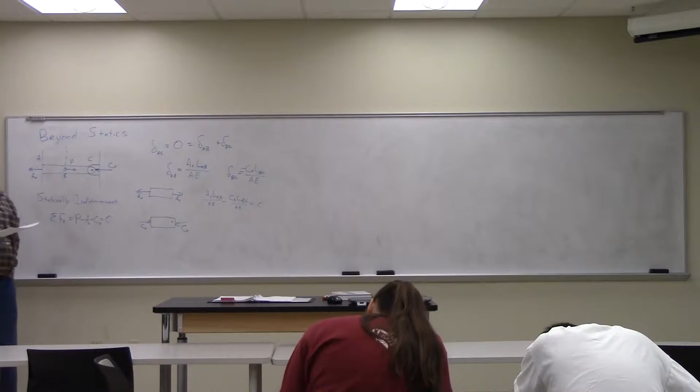Hey, can I just take a minute? Yeah. What is the proper terminology for E? Is it elastic modulus or Young's modulus? Okay, so elastic modulus, that will be fine. So it's just a number representing how stretchy something is? It's the slope of the stress strain curve, yeah. Because most everything we do, we assume we're behaving in an elastic regime. We don't want anything to plastically deform, to deform beyond coming back. And if we do, we deform it, and then we put it in the system, and it behaves elastically up to that. Remember, we talked about it, but once it's been strained, we have the strain hardening, so we're still working in that elastic regime. Okay.

So, we can cancel out the AE because it's the same for both ends of the bar. And we're left with an expression then for AX in terms of CX: LBC over LAB times CX. And if I come back to my original sum of the forces and solve this for AX, that has to equal P minus CX.

So I've got two CX's in there. Let me rearrange the right-hand side of this equation. Well, I'll just skip to the end. You can go back and do the algebra if you want. CX then is going to equal P times LAB over the total L. And AX is going to equal P times LBC over the total length.

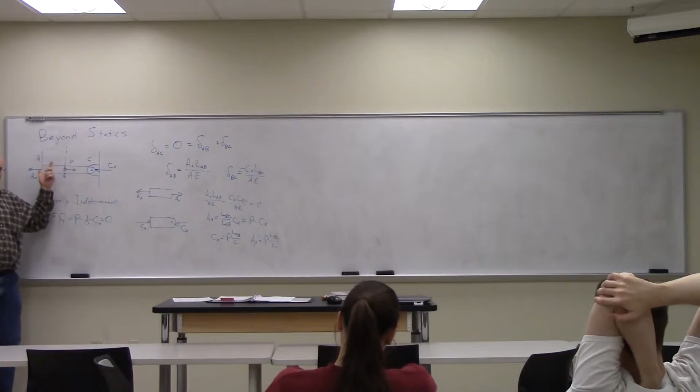No, we're not cheating. We could do it with P in there, it would just be harder, right? Then in here we'd have a P pulling in this direction, a CX pulling in this direction, and then we'd have a P minus CX pulling in this direction. We'd be right back where we were to begin with. So mathematically solving for it would be difficult, if not impossible, because we just have too many unknowns.

So the effects of the force of P are contained in our CX and AX, right? Right, yeah, because this is where P comes in. So we're just trying to figure out what is the distribution of the reaction forces between C and A. And what we found is the distribution depends on the relative location of the application of P. So if you think about it, CX is P times LAB over L. As LAB gets smaller and smaller, CX gets smaller and smaller. But that makes sense.

If P comes all the way down here, then I'm going to get a huge response from this thing and not so much down here. You can kind of sense that it's a piece of rubber. If I'm pulling on a hole that's right here, the real stress is going to pop right here. All the stress is going to be placed here, and there's barely going to be anything felt down there. Does that make sense? Yeah.

I guess the only other thing I would ask, this is getting a little bit out there. We can do that for that one force in the middle, and I understand that now. But what if we have two forces, like two holes like that? How does that change the dynamic? Right, so in the simplest sense, it changes the dynamic because you have to do the analysis twice and use superposition. Okay.

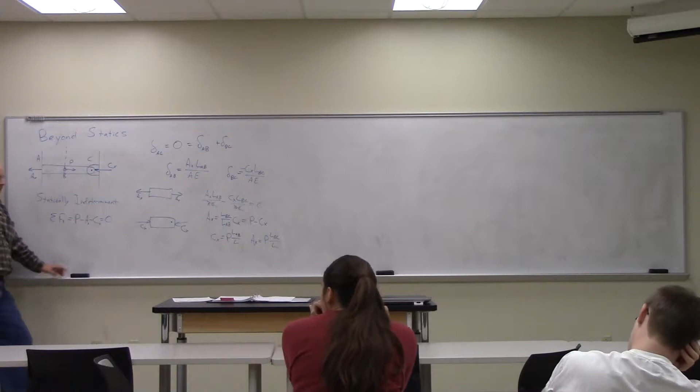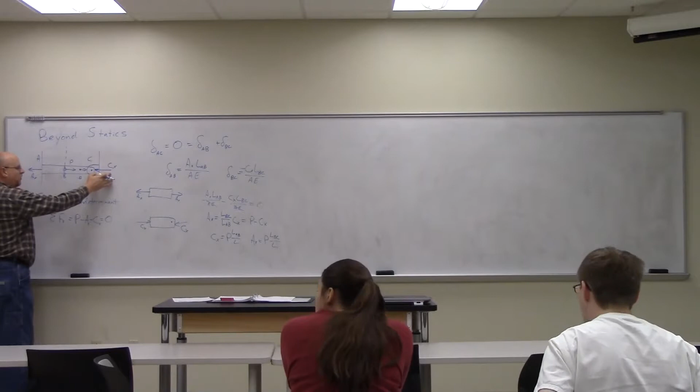Right, because that's how superposition works. So it still holds. You could do the same thing straightforwardly, you just end up with more terms and more equations. And you'd end up with something for CX that is the sum of P times LAB over the full length, plus, if I have a point D in here with another force F acting on it, F times LAD over the full length. So superposition. That's where we'll end up in the end.

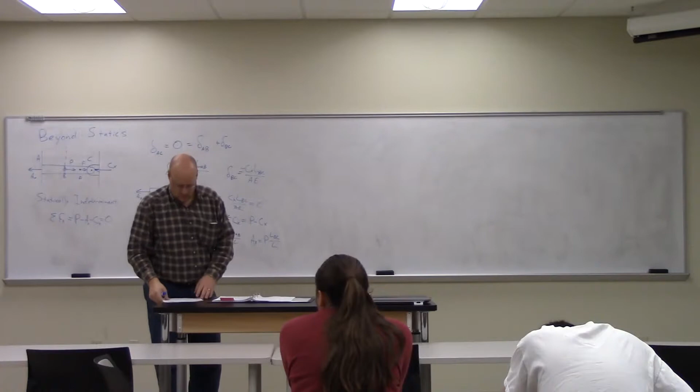Okay, that makes sense. That's why superposition is particularly helpful. In fact, we can use superposition to go back and do this analysis. Let me take that off of there.

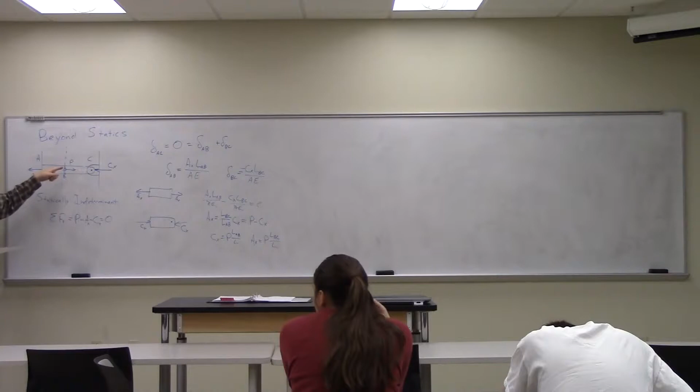We can use superposition to go back and do the analysis in the first place. We've got that the delta of the whole thing is equal to 0, equal to delta due to P minus delta due to C.

So if we look at this picture, I can break it apart into the two ends, geometrically, or into the displacement due to P and displacement due to C. Because AX, and I'm measuring all my displacements relative to this fixed barrier, AX does not contribute a displacement. There's no strain due to AX, because that would be delta over L naught, and L naught for AX is 0.

Because I'm starting out right here, where the force is applied. So the only forces that cause an elongation are P and C.

Going back a little bit, could you do the algebra real quick for AX? So I essentially moved the C to the other side. P is equal to CX plus LBC over LAB times CX, which is equal to 1 plus LBC over LAB times CX, and 1 becomes LAB plus LBC over LAB times CX.

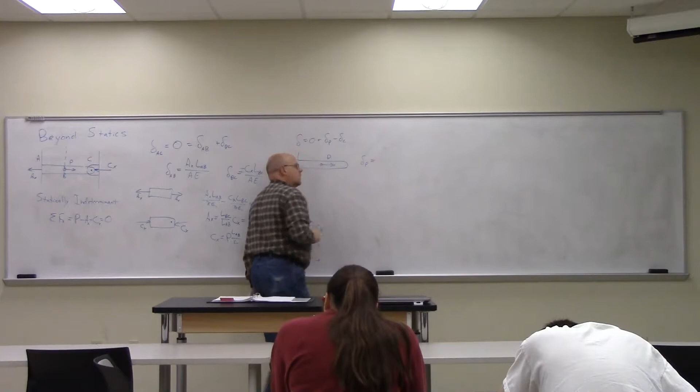Now if we do it in terms of the forces, I first look at it as if it's a bar with no constraint at the end and just force P pulling on it. So delta P, delta due to just P, well there's no extension in this end at all, because it's not experiencing any force in this configuration. So delta due to P is just the force P times the length over which it acts, AB over AE. Right, so essentially I'm just pulling on this little section, and that's just dead weight at the end.

Similarly, I can draw the same thing, but now I only have CX acting, and P's not there. So delta due to C is equal to, let's leave it as a plus and put the minus sign down here. So delta due to C is CX, the applied load, times the full length of the bar, because in this case CX is compressing the whole thing, divided by AE, but because it's compression, it's negative.

So now what I end up with is P times LAB minus CX times L is equal to 0. Getting rid of the AEs because they're the same. Move to the other side: CXL is equal to P times LAB. Dividing through by L, CX is equal to P times LAB divided by L, which is what we had before.

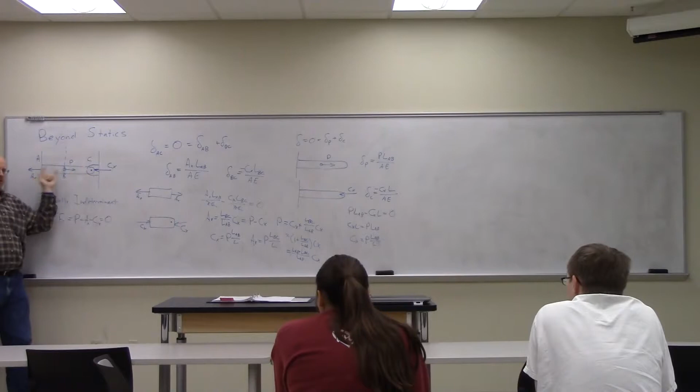So either approach works. Superposition, or treating it as geometrical superposition or load superposition, both arrive at the same result.

Why were you ignoring A again? Because A is applied here, and this is my 0. So there's no length, no initial length for A. It's sort of like the piece of paper—I can push on that all I want, but I'm not getting any displacement on it.

Okay. How do you feel about that? Clayton feels okay, not everybody else. You guys with me? Okay, we're kind of put on the spot then. Last person to say yeah. Not me. Not you, okay. All right.

So effectively we just need to understand this fundamental rule: it's all about the contribution from the reaction forces—the magnitude of the reaction forces is the total load applied, normalized by the opposite end, the ratio of the opposite end.

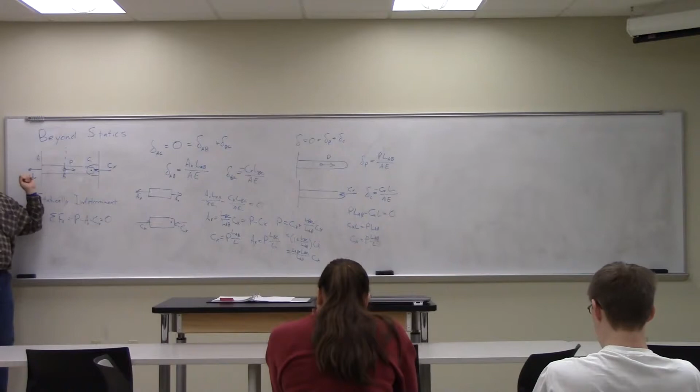All right, so then by sum of forces, you'd end up with the AX expression in that equation, if you did sum of forces. All right, so let's look at a...

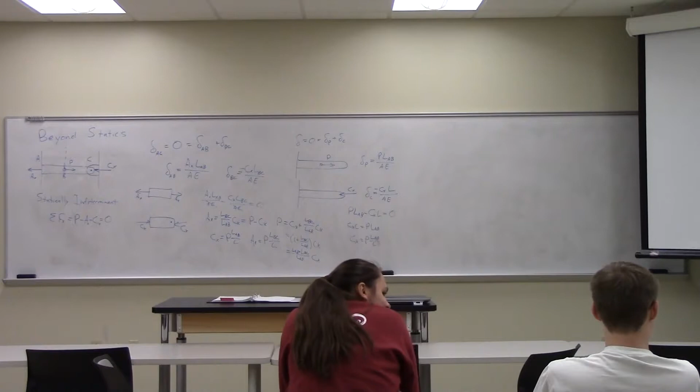Hey, you're a hacker.

We could build an antenna, see how much strain would go on the keyboard if we threw it down the balcony. Ooh, I like that idea. Check out the plastic. I was focusing on the classroom material here, I'm sorry. That was classroom material. Yeah, we wanna see how much strain it takes if you throw that off the balcony, how much strain it would experience. What specifically can we measure when it hits the floor? Only if you had a good way of instrumenting it to measure.

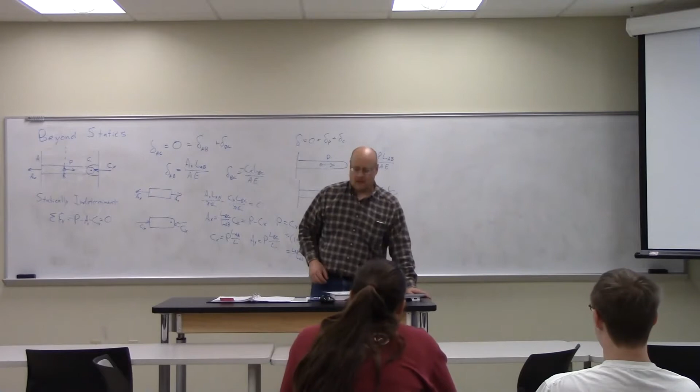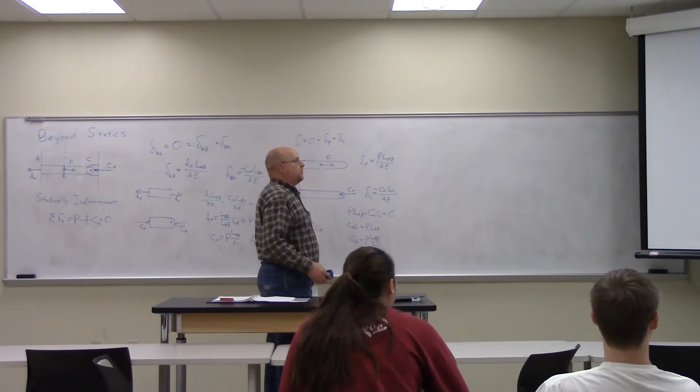You chatted to me, whatever. I was wondering why I saw all those awesome words with your voice coming out of there. That's not electronics. All right, so we're gonna do the first one up there at the top. It's pretty much a steel pipe filled with concrete. Sounds delicious to you. Yep, it's like a donut.

And we're gonna put a compressive force of 80 kilonewtons on it. We need to determine the average normal stress in the concrete and the steel due to the loading. The pipe has an outer diameter of 80 millimeters and an inner diameter of 70 millimeters, and then you have moduli for the steel and the concrete.

So what's the first thing we're going to do? Can we go free body? We need a free body diagram. Okay, glad Blake's back in class. Yeah, we had a channel you last time. I'm gonna take free body for... I channeled you from your sleep. The daily double. Thank you, Blake.

Okay, 80 kilonewtons. So, pretty straightforward free body diagram, right? Not much to it, force on both ends. And we want to find out what the average normal stress in the concrete is, and then how much is in the steel.

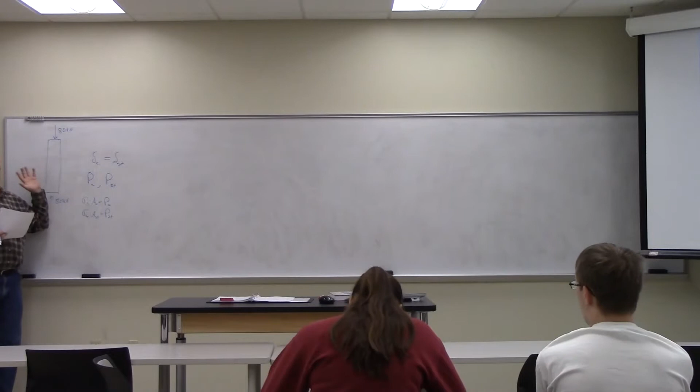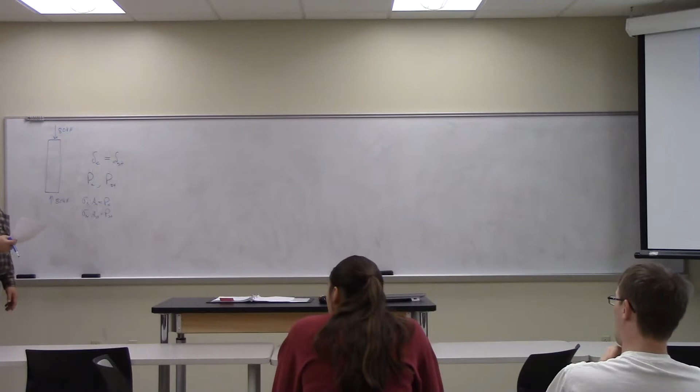So we have to have equations though, right? I mean, these are just redefinitions. We have to have two equations. I was thinking it's stress times area. P is force, right? P is the normal force that I was thinking. You can use P for that. Well, yeah, the last example we used P.

The first equation is easy. What's the easy equation? Sum of the forces, right? So P in the steel plus P in the concrete has got to equal 80 kilonewtons - that's the total load being borne by the column. So we know the fraction of the force borne by one is 80 minus the fraction of the force in the other. That's our first equation.

Now we need a second equation. It's actually already on the board. Expand our delta C or delta ST expressions. So what is delta C?

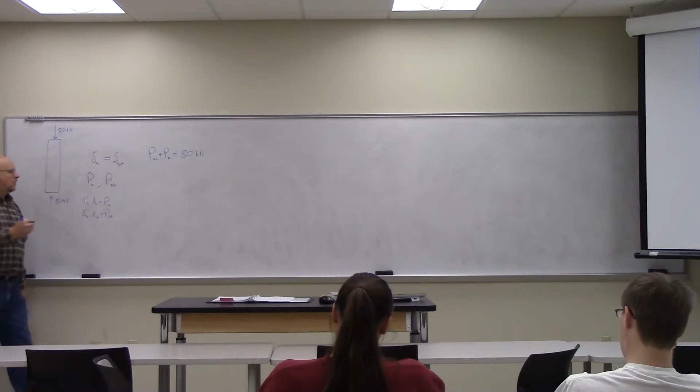Concrete. It is funny when you say it. P in the concrete, times length over the area times the modulus.

Okay, any other subscript you want to put in there? The area of the concrete and the modulus of the concrete. Right, so the L is the only thing that's the same. Yeah, and that's got to be equal to P in the steel, L over A in the steel, E in the steel.

So now I have two equations, two unknowns. I know A of the concrete, I can find it. I know A of the steel, I can find it. And in fact, since it's asking for the normal stress in the concrete and the steel, I would look at this and say, oh look here - that already is my normal stress.

So maybe what I really want to do is write this as sigma C times L over EC, equals sigma steel times L over E steel, and then make sure I divide through on each of these terms. See what I'm saying? But for the time being, that's not the way my numbers are based on this, so I'm going to keep it as the solution key has those numbers.

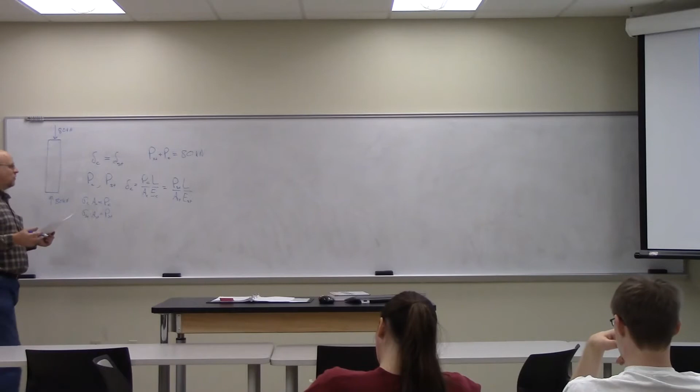So two equations and two unknowns. What's A of the concrete? It's gonna be just pi - let's see, 35 millimeters squared times, what, 500 millimeters? No, it's just the area. Oh yeah, sorry, subtract. Okay, I went pi over 4 times 70 millimeters squared.

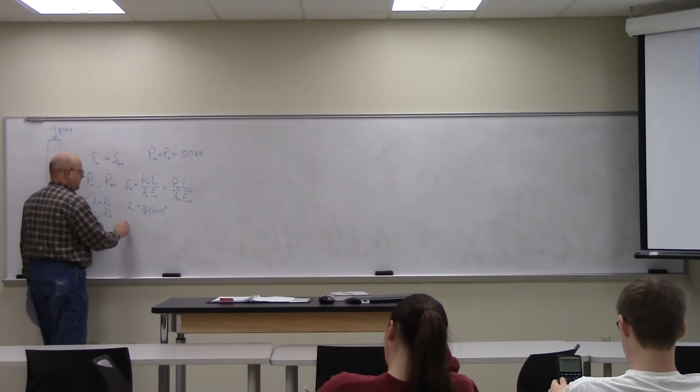Okay, what's A of the steel? It's going to be pi over 4 times the 80 squared minus 70 squared.

Okay, so I got the areas, the E's were given to me, the L's are all 0.5. I've got two equations, two unknowns, I'll just give you the values. P of the steel equals 57.47. P of the concrete is equal to 22.53. Is that what I got? Is that my answer?

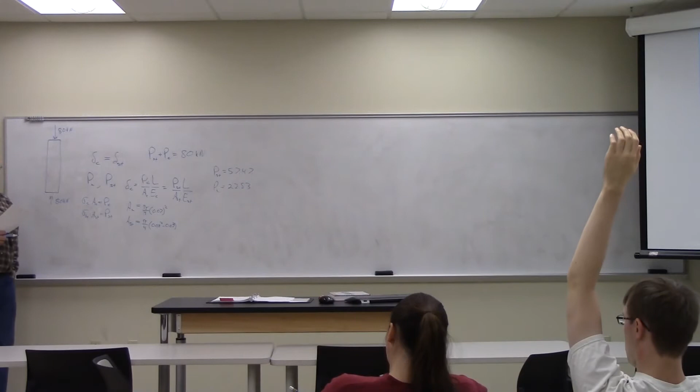For the area of steel, does the square go on the inside or outside of the parentheses? It goes on the inside, because it's the area of this one minus the area of that one, and those are both d squared. I think they're both negative. Yeah, but for the normal stress, we'll just have to specify at the end that it's a negative normal stress. Everything's compressive in this problem, so you only have to put a minus sign.

Now we divide through by the two areas, right? So you take P of the concrete divided by this, and P of the steel divided by this, and we end up with sigma of the concrete is 5.85 megapascal, and sigma of the steel is 48.8 megapascal. Does that make sense?

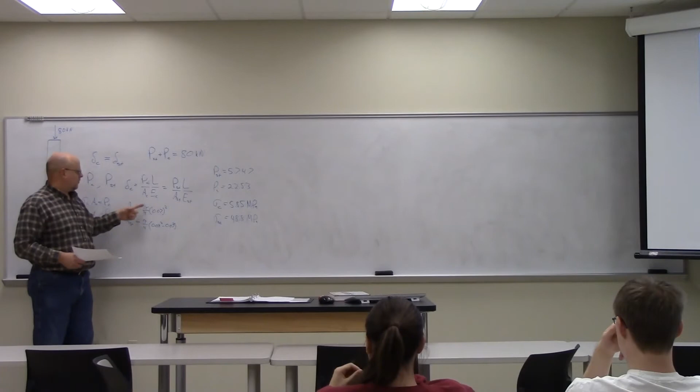Where did you plug in the area to find the P? Just take this number divided by this number. It's load per unit area, which is the stress. Where did you get the P? I missed how you found P. Just solving these two expressions. So I have two equations, two unknowns. Oh, you just put it together and solve, okay. Right, I just solved for them.

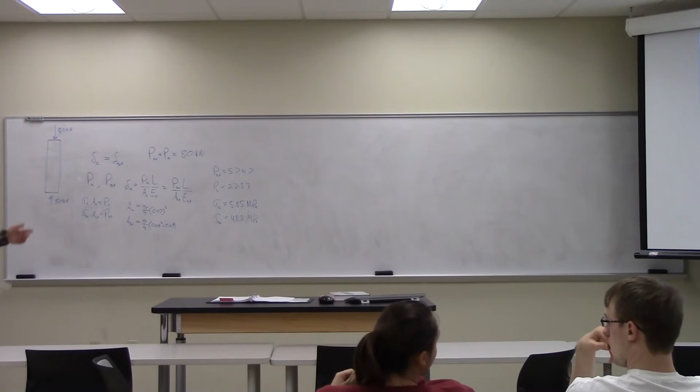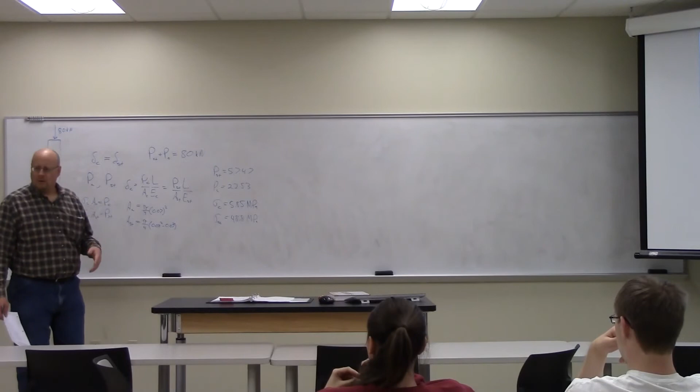I don't think we really need to work through the algebra in here. Hopefully we're okay with that. Just had to make sure. You've all had math methods, so at least you know how to solve multiple linear equations. So we don't have to do that.

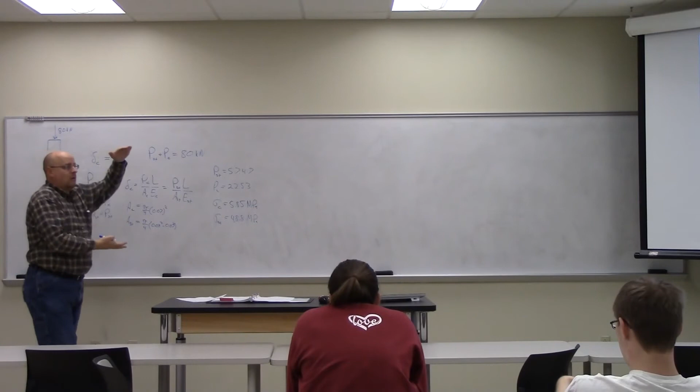Okay, is that good? So the point here is to show you that unlike the example I gave you in the lecture part at the beginning before we got to the problems, where everything was driven by delta, a delta constraint, here we don't have a delta constraint, except that the two are equal, they're not equal to 0. So in one case we have delta equals 0, here we have two deltas that are equal to each other. So there you go.

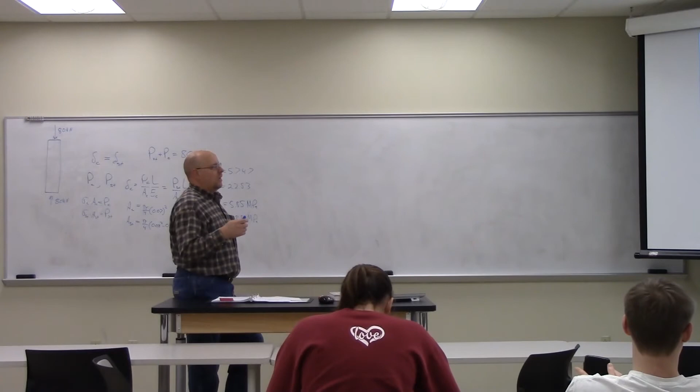Now, let's try 46, let's see how far we can get, we've got 10 minutes. So we have two columns joined in the center by a mating plate, and then there's a little gap at the right-hand end. The gap between C and the rigid wall D is initially 0.15 millimeters, barely more than the width of a human hair. Determine the support reactions at A and D when the force P on that mating plate is 200 kilonewtons. The whole thing's A36 steel.

And we're assuming that the columns are solid columns, not hollow columns, not pipes. So, how do we do this? Well, here we can't say delta equals 0 because delta can be 0.15. And we can't say delta of one piece equals delta of the other piece. So we don't have those constraints.

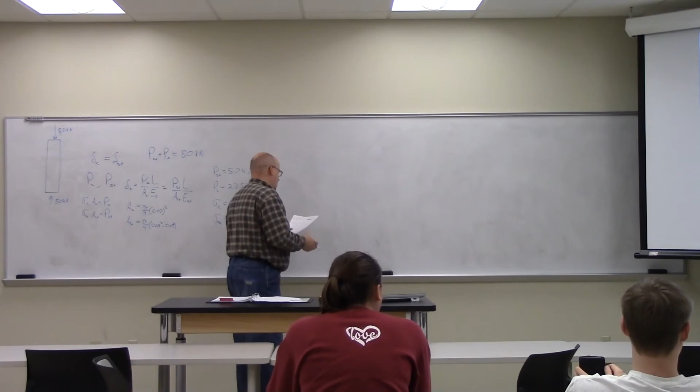So we're going to take one of two different approaches. Where are we going to start? Could we do a free body of AB? A free body diagram. Okay, you want to do it? Well, let's just do the free body diagram of the whole thing, and then we'll break it up if we need to.

Okay, and we have a P applied here. Is that P on the mating plate? Right, so it's on the interface, not on column A or column B, they're mated together. So it is shared. Okay, there's one force. Any other forces? Reaction force at wall A, in the minus X direction probably. Let's call it A, because everything's one dimensional.

Any other forces? We're assuming it's not the weight. There is one other force. Is it a normal force at the mating plate, BC pushing back on P? No, because right now we have the whole plate, that's an internal force, a pair of internal forces. It's going to be the normal force of wall D when it touches. There's going to be a force there when it touches.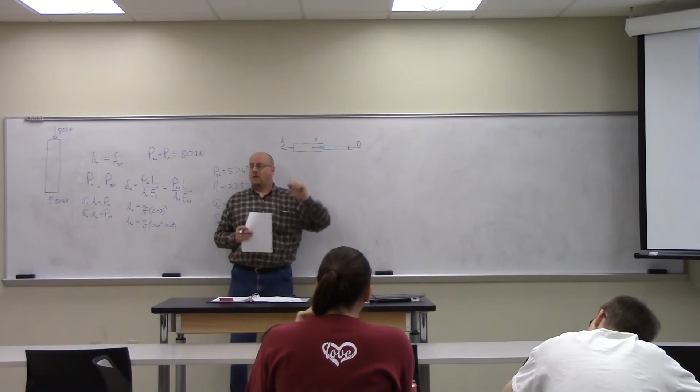Do we technically know it's going to touch though? No, we don't know that it's going to touch, but if we find a negative value for a force, then we know that it didn't touch. So if we find that D, in the orientation we've drawn it, is negative, then we know it never touched. To have achieved that condition where it reached the end, D would have had to pull on it to get it to reach there, and we say, oh, that couldn't happen. So there's the overall picture.

I'm going to suggest that we handle this one by superposition. Anytime you have this thing where you wonder, is it going to end? Is it going to touch? Is it not going to touch? It's best to handle it by superposition.

What we know is that delta of the whole thing equals delta due to the force P plus delta due to the force D, just like we had before. But now instead of that being 0, we know that that's 0.15 millimeters.

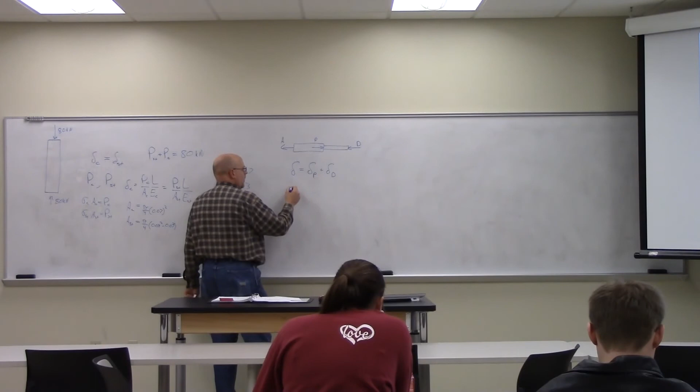So now we indeed break it up into the sections we were talking about. I'm still going to draw the whole thing, but in the first case, I'm only going to apply force P. And I'm going to say, okay, the delta due to P is equal to what?

Force times the length... P times the 600. What's P? We have numbers for everything, so we put it in. The 200 kilonewtons. So we have 2 times 10 to the 5th times 600 millimeters, times 0.6 — notice she only chose 0.6, not the whole thing, right? Because P is only going to stretch this left-hand end. It's going to have no effect on this right-hand end.

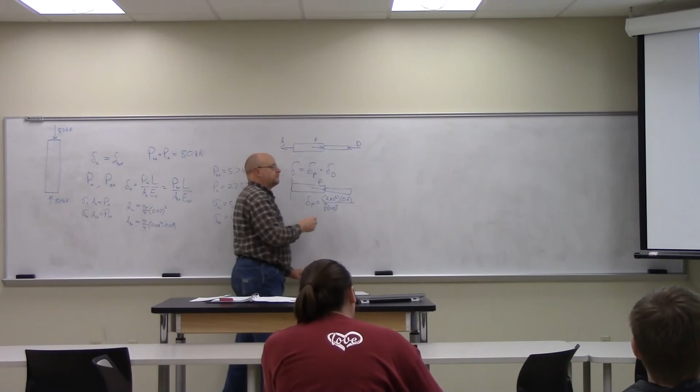Over the area, which is 50 millimeters squared, times the modulus of A36 that we can look up in the back. What was the modulus of A36? It was 29... oh no, that was in US units, sorry. In GPa it's 200, 200 gigapascal. So 2 times 10 to the 11, keeping everything in SI units.

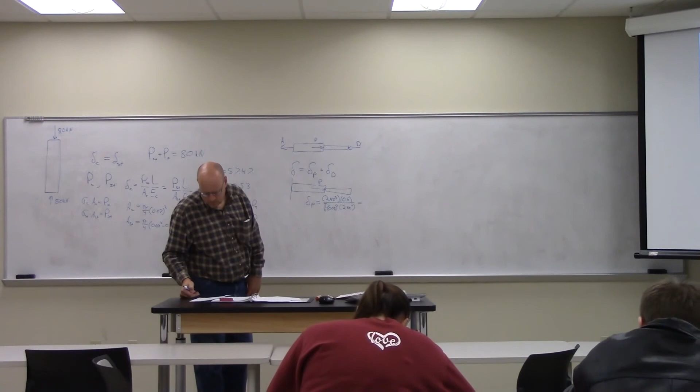Did they give me a value of delta P? No, they don't break it down. They don't give me a value for it. Okay, whatever that number is.

What about delta D? Same thing, but now for delta D we have the picture that looks like this. We don't know the force D, so because we need to calculate it, D is going to be our unknown, because we're calculating reaction forces.

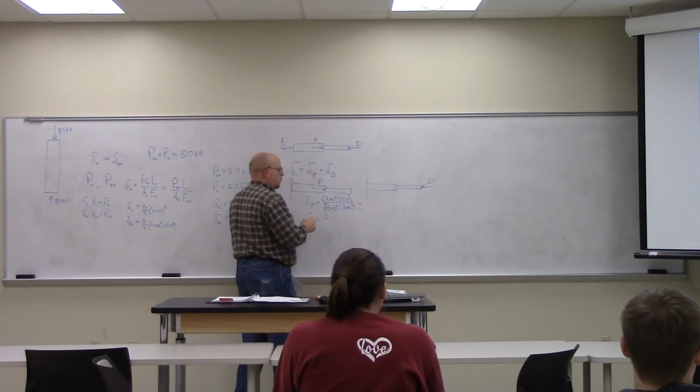D times what length? So it's D times 600 millimeters, or if we're splitting it up, we just want 0.6 meters. D times 0.6 divided by what? By pi over 4 times 0.025 squared, times the same modulus, 2 times 10 to the...

And then add the big portion. Plus? Yeah, we said add the big portion to it. What's the big portion? The D times 0.6, and then the area of 50 millimeters times the same modulus. So now the same load D acts on both halves.

It's compressing this piece and it's compressing this piece, and it's the same load. On an axis like that, the load has to be the same at every point in the axis. So this piece is experiencing a 600, or a D compression, and that's what this delta is. But this one's also going to compress, so it's got its own compression. So you have the total of both of them — we have to add this plus this to get the delta.

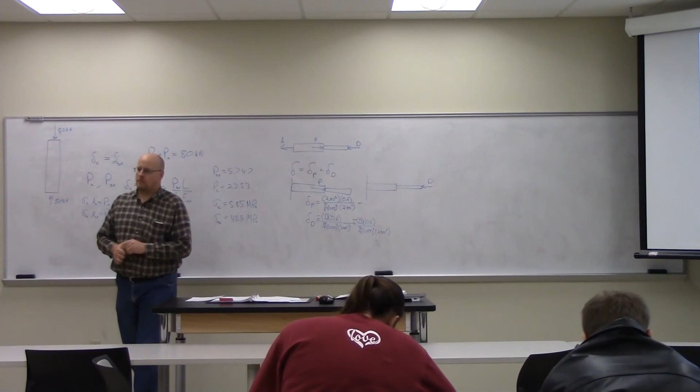One more thing is missing. What is it? The delta D is negative. Right, these two have to be negative because they're both compressive. Add those three together, we get 1.5 times 10 to the minus 4 meters, or 0.15 millimeters.

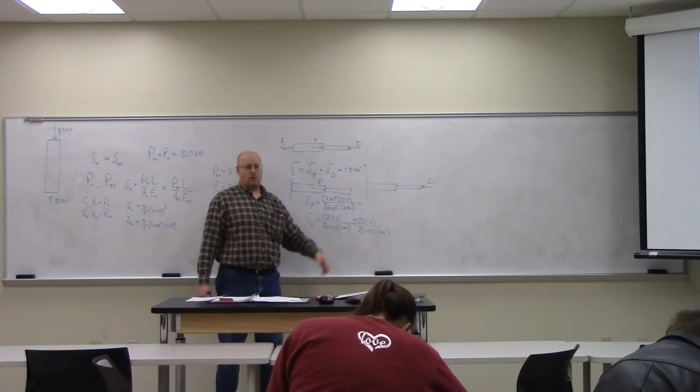If I add this minus this equals that, the only thing I don't know is D. I can solve for D. And once I have D, then I can come back up here and use sum of the forces to solve for it. Then I know everything.

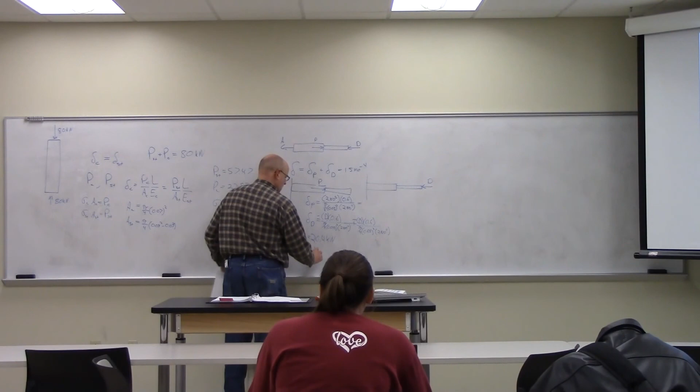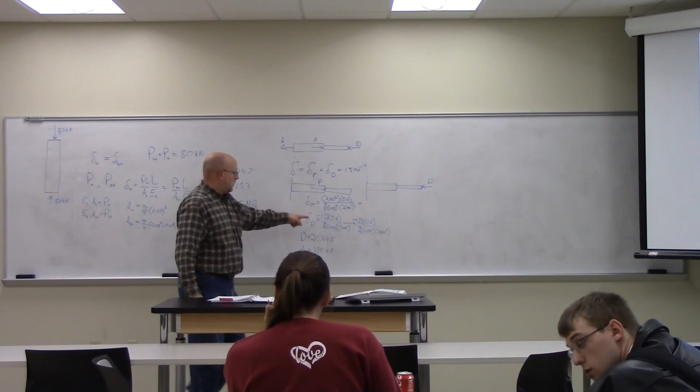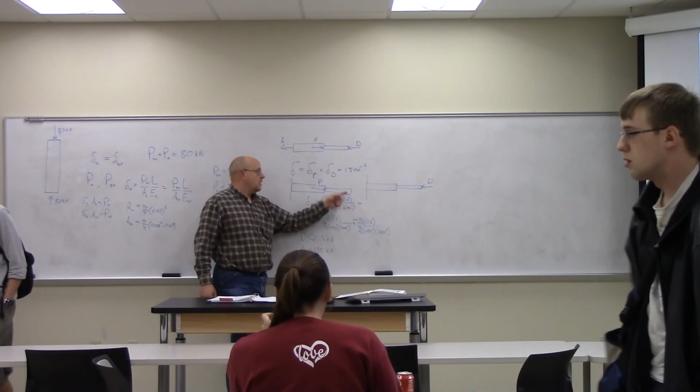How did you say you did D from the two? That's the only unknown — I take this, and that's equal to that, and then I'm plugging these values in up here. The only unknown that's left is D. But how do you, okay. Yeah, you add the two together. I take this, minus this — yeah, minus this, you don't know D — equals this, 1.5 times 10 to the minus 4. How do you know that? Because it moves by 1.5, it moved by... oh, 1.5, okay millimeters. Yes, yeah, it's all about the mojo.

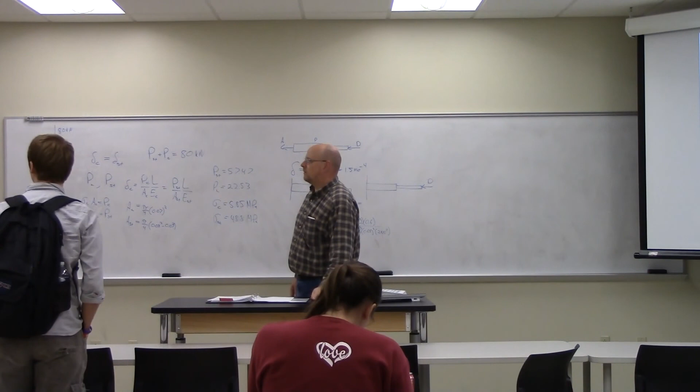Okay, there were only 5 people. No, there were 6. 1, 2, 3, Colin, Blake, Jesse, and you. Jesse. 7.